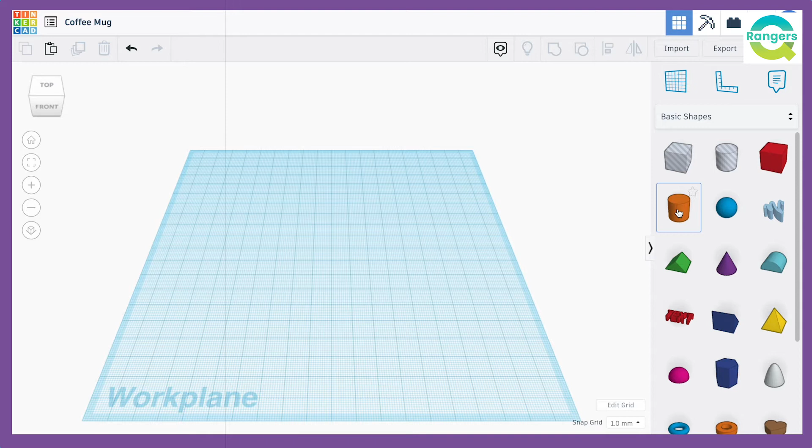Oh, cool, let's get started. First, we need to start with a basic shape. Let's grab a cylinder and using the boxes and the corners of the shape, we're going to drag and scale it up a bit to a proportion that we like and make it a little bit taller. That's a cup? But where do you put your drinking liquid? No Qbot, this is just our starting shape.

Next, we need to add a hole to this cylinder. Can you explain what a hole is, James? A hole is a very useful tool. Any of the shapes can be redesigned by hollowing them out or creating a hole.

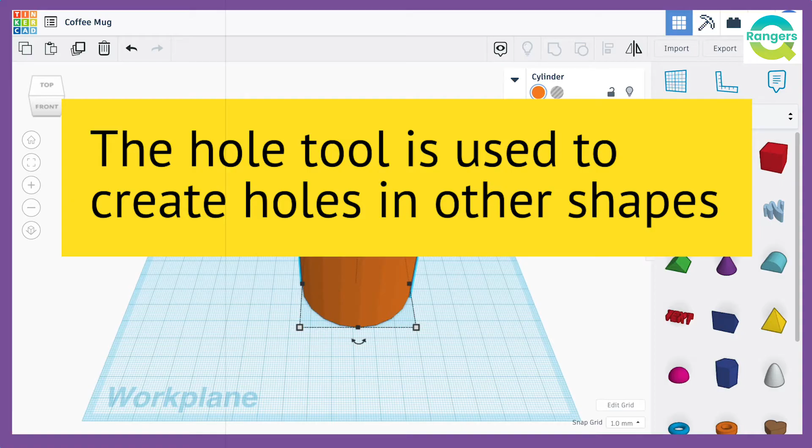Now, to create an opening in this cylinder, we need to grab a second cylinder. So we need another cylinder shape to make a hole in the first cylinder shape? That's right, Qbot, I will show you what I mean. First, let's scale this second cylinder up and make it taller than the original. We also don't want to cut all the way through the bottom, so let's raise this inner cylinder up off the work plane so we don't cut through the bottom of our coffee mug.

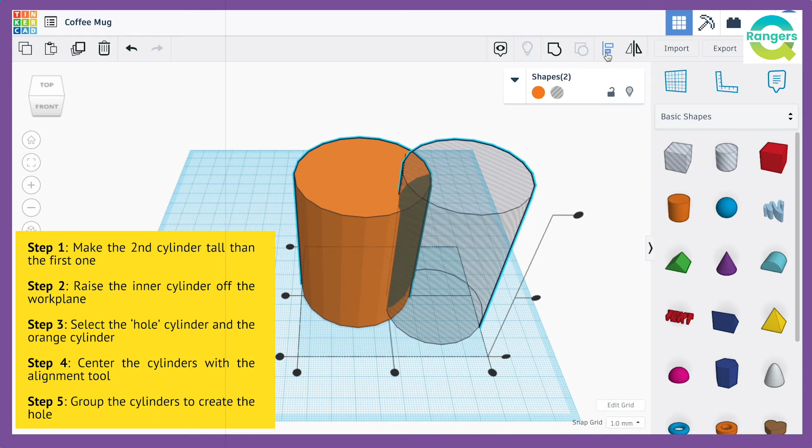Let's make this cylinder into a hole shape by clicking here. We need to center these cylinders together, using the Align tool for this. Select both the hole cylinder and the orange outer cylinder and use the alignment tool to align and center these shapes together. Now that the shapes are aligned, we are ready to make the hole for our mug.

When we group these together, this new shape kind of looks like a regular cup, but we want a coffee mug. Oh, because we're missing the handle, right? Yup, so we need to add a shape to create the handle.

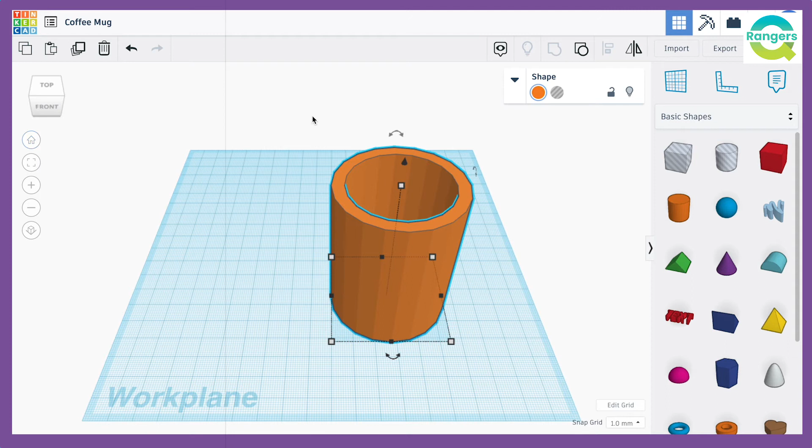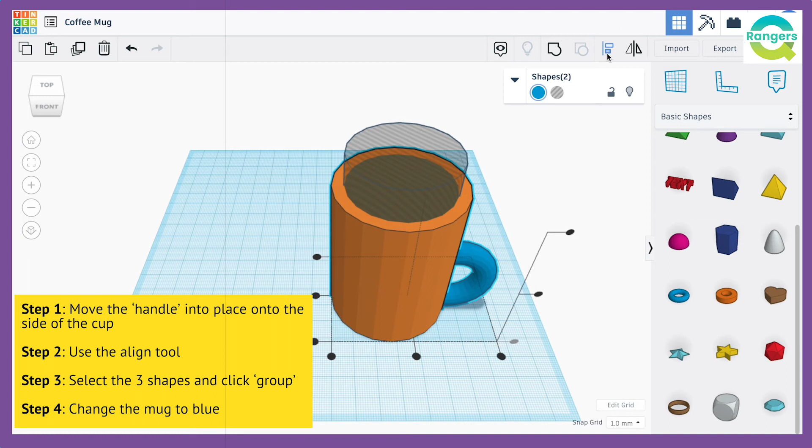So for now, let's ungroup these cylinders and grab this donut shape called a torus. We'll make it a little bit bigger and turn this into the handle. Let's rotate it 90 degrees this way and this way. Let's raise it up on top of the work plane, which is 0. We can get this into position and adjust it with the alignment tool. We don't want to center the handle because that will throw it into the middle of the coffee mug.

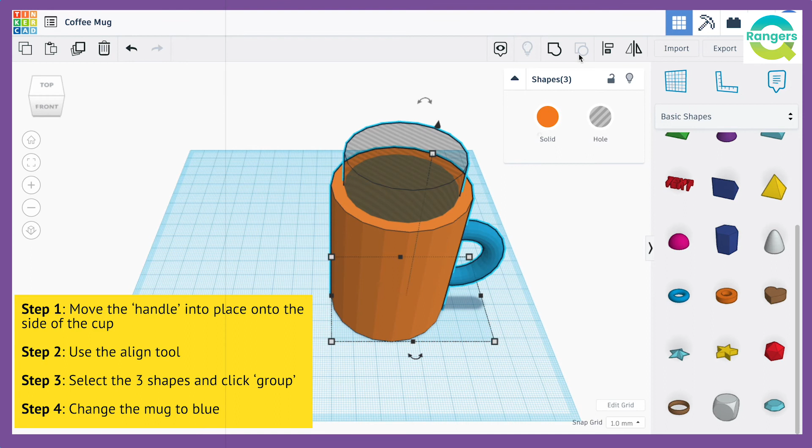Oh, I see, the handle looks a bit too thick. No problem, we can change the thickness of the handle by going to Tube and entering 2. That looks easier to hold. Let's just slide this handle into place here. Now we can group everything together. As you can see, the hole cylinder also cut away the other half of the torus to create a handle.

Let's change the mug to blue. Wow, that looks really cool, James. It sure does, and you can create your own coffee mug at home.